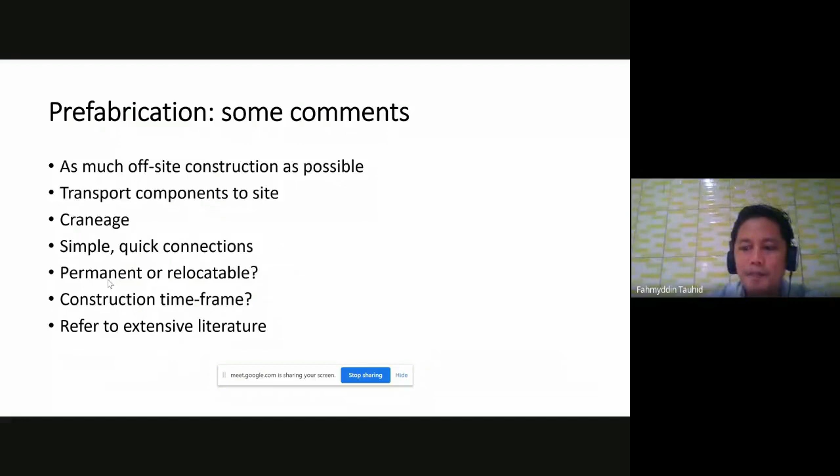Yes, so we have to answer the question: is the hospital going to have a permanent life, or are we going to deconstruct it and maybe relocate it? Maybe it could be stored somewhere so that in another crisis in some years' time, it could be erected somewhere else. Because if we want our structure to be relocatable, then we have to make sure that it's basically a bolted construction, and everything can be unbolted and rebolted.

Then there's the question of the time frame. How long have we got to design and build such a facility? And of course, the longer we've got to build it, I suppose the better the job will be, because we're going to be able to perhaps make the construction more economical, because we won't be putting so much emphasis on speed. So the construction time frame is also important.

And finally, I just want to refer you to quite extensive literature on prefabrication. Prefabrication is not a new phenomenon. In fact, it started as early as the 14th century. Famous kings had their temporary houses transported with them when they went on battles. And so prefabrication has actually been around for a long time. And I think you would enjoy looking at some of the literature that talks about it. But I'm not going to say any more about that today.

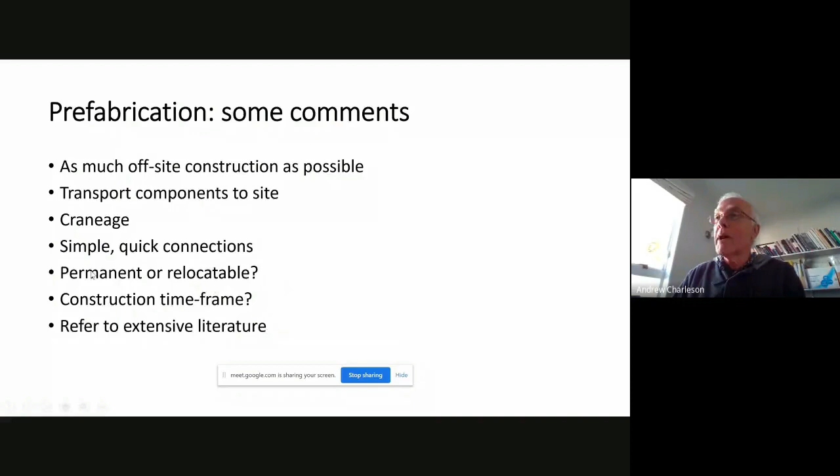So I just want to now mention just 4 aspects of hospital design. And the first aspect is that in hospitals, there are so many functions that we as designers have to accommodate. There are big numbers of staff and different types of staff: doctors, nurses, support staff. And the support staff include, I suppose, administrators through to technicians, through to maintenance staff.

And then there are lots of departments in hospitals: a department for doing triaging or examinations, radiology, pharmacy, laboratory, the wards for the patients, operating theatres, intensive care units, and so on. So a fully functional hospital is actually very complex, with a number of different departments and different aspects that designers have to consider.

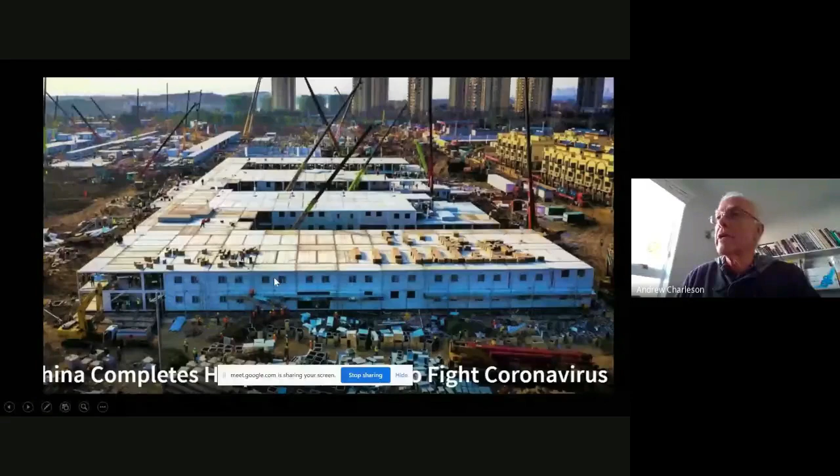Secondly, you can see the large number of cranes on the site. And during the foundation works, there would have been 20 or 30 diggers and bulldozers. So the whole scale of construction is just beyond what most of us have ever encountered. And then we can begin to see the structural framework of the building.

And over on the left-hand side, can you see my cursor, please? Is my cursor visible? Oh, thank you. Yes, we can.

Thank you. So you can see that the construction of the superstructure has begun by putting down a floor system. And there we can see the floor system. And then the workers erect columns, and in this building, they're all out of structural steel. And the columns have some degree of fixity at their base, like they're able to cantilever vertically. And then having erected the columns, this floor is craned into position. And look, here is a big stack of floor slabs ready to be craned in.

And then what surprised me is that they put in this system, and then immediately over the top of it, they put in another floor system. So can you see these 2 layers of structure? Now that seems to me very unusual. And maybe this was the price for the speed that was required. Because normally we would never construct having a ceiling system and a floor system just one on top of the other. So, you know, that is very unusual.

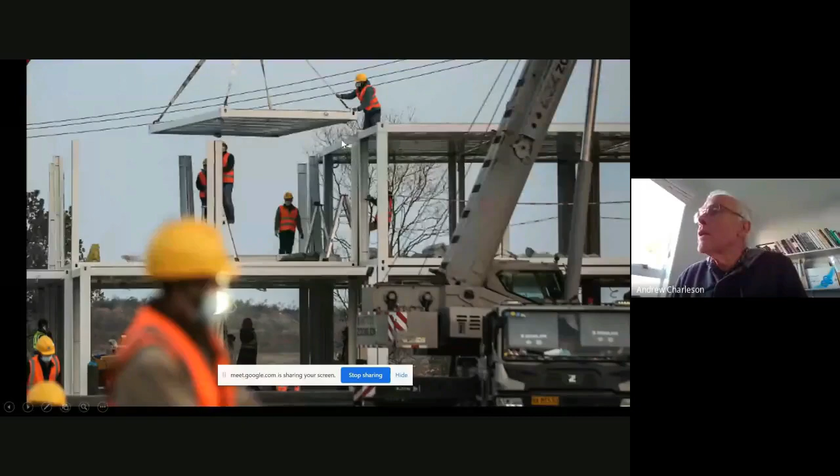Anyway, then they build up more columns and put the roofing on, given that it's only a two-story building. Here we see the roof system being craned into position and being lowered on to these vertical cantilevered columns. And so in some way, there's enough rigidity in these joints to create a type of frame action to give resistance to wind forces and earthquake forces, because there's no other bracing in this building.

Here on the right of the screen, you can see the double layers. That is so surprising, and we would need more details to really understand exactly why they might have done that.

In other parts of the building, we see them craning down a module, like a self-contained room, really. Maybe this room will house several patients. And this little room has got its own floor system. It's got some steel beams and flooring. And this floor system goes straight on top of this existing platform here that has been craned into position.

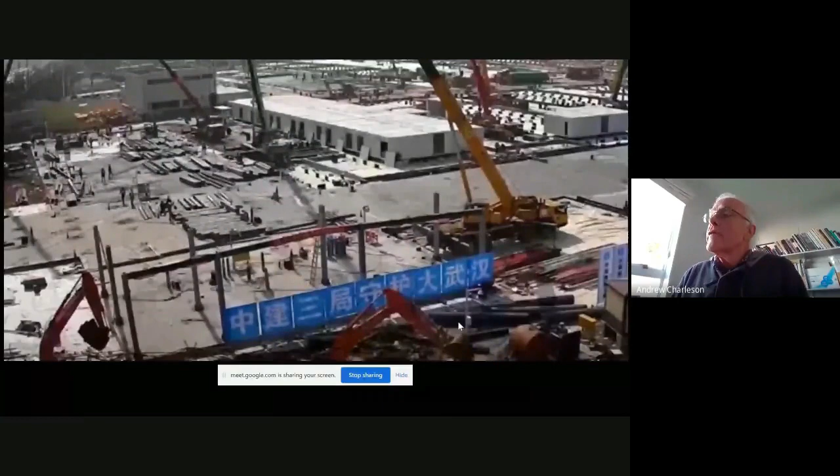I'm not sure if this is the same site as the other hospital or not. This might be the second prefabricated hospital that was designed and built incredibly quickly. But I show you this slide because here you can see some quite long spans in this part of the hospital complex. I mean, this would be probably between 8 and 10 meters, and maybe this span could be as

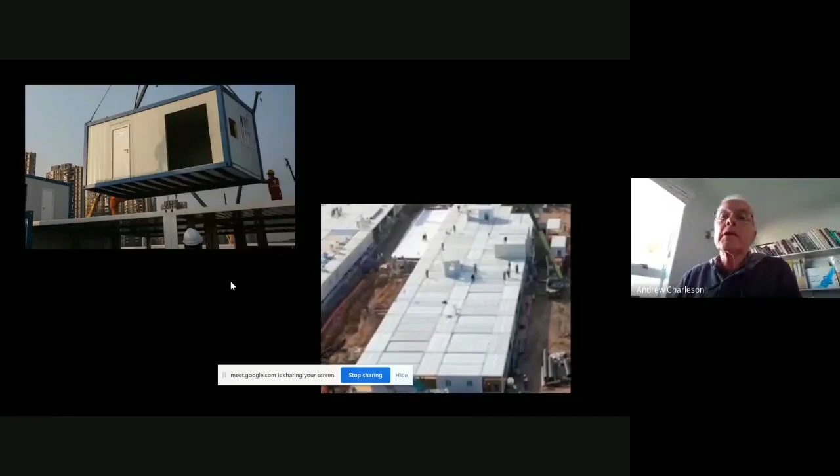much as 12 meters. Whereas the previous construction we saw, the module is only of the order of maybe 3 to 6 meters, quite small spans between modules. So this is just to remind us that it is possible to build quickly using prefabrication and have somewhat longer spans. Notice too at this stage that all the structure has been in steel. That is definitely the material of choice for prefabrication.

And the vertical load-bearing elements consist of steel sandwich panels with high density polyurethane foam acting as the sandwich filling. And so, in contrast to the Chinese hospitals, a hospital like this is relying on wall panels. They might be about 12 centimeters thick, not that thick. And these wall panels are capable of resisting the gravity loads and any horizontal loads from wind and earthquake.

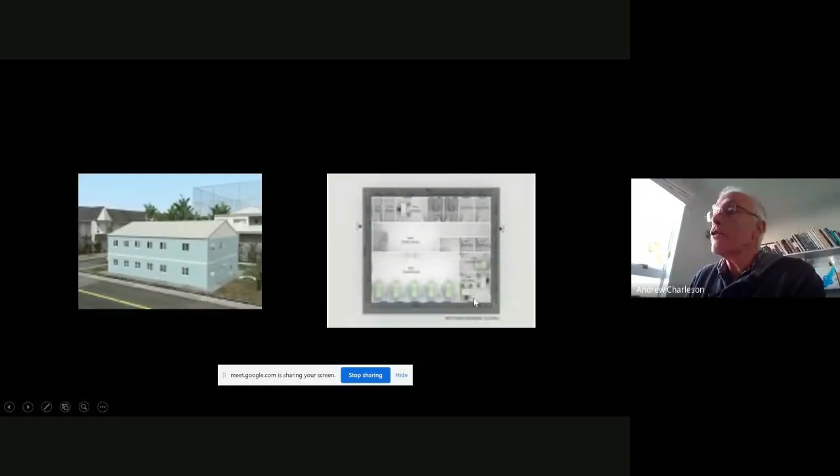And so this is a totally different model of prefabrication, not using any columns at all, but it's all about using load-bearing panels. And of course, because the span across the building is so great, it means that the beams spanning have to be quite deep. And from memory, this distance is 13 meters, so the beams or trusses would have to be about 60 centimeters deep at mid-span in order to span 13 meters.

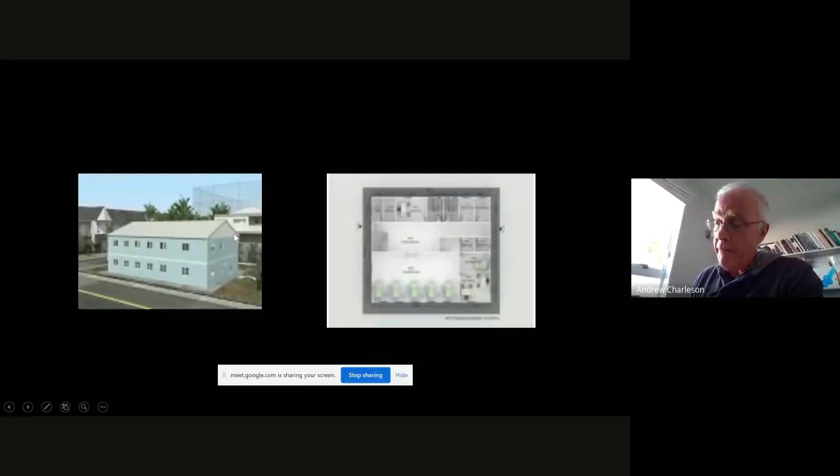Anyway, this type of construction is certainly very lightweight. There's no concrete in the superstructure. And the roof trusses would probably be made out of very thin gauge galvanized steel components.

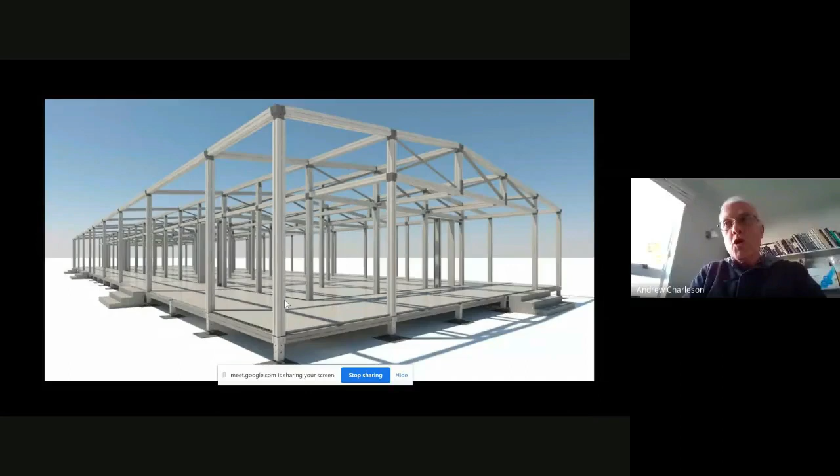And here is another type of prefabricated hospital structure, just showing the structure, no cladding yet, no roofing. And what I found interesting about this particular one is that all the structural components are aluminium. And of course that rings warning bells to me, because aluminium is quite an expensive metal and it's an expensive material. And so this type of construction, I would think, would be very expensive. But it looks very effective.

It's relying on small modules, I think about 2.4 meters here. And it's interesting, they do have some larger spans here, for example, because they're using this truss. And so in this building, they've got perhaps a corridor here and longer spans to create some larger functional modules. This, of course, is only a single-story building, and so the structure is a lot more simple, really. But nonetheless, we would need some rigidity in the joints to make this framework stable against earthquakes and wind.

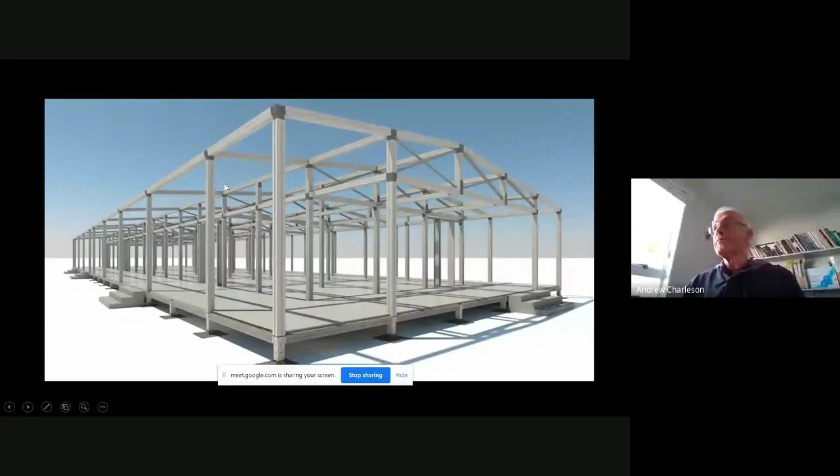So there we have finished the first couple of sections of my presentation. And now I want to move on to structural considerations. And I want to begin by talking about siting.

It's really crucial when we are thinking about providing a hospital that the site is safe. And so it's absolutely essential that we eliminate any risk of tsunami.

We've got to make sure that there's no liquefaction that could destroy the hospital or make it not function properly. And also we have to avoid the possibility of lateral spreading.

Lateral spreading occurs generally close to water bodies like rivers or lakes, where during an earthquake, the land near the lake or the river slides towards the river. We call that lateral spreading. So you definitely don't want to site a hospital near a river, nor do we want to site it where it could be affected by landslides or rock fall.

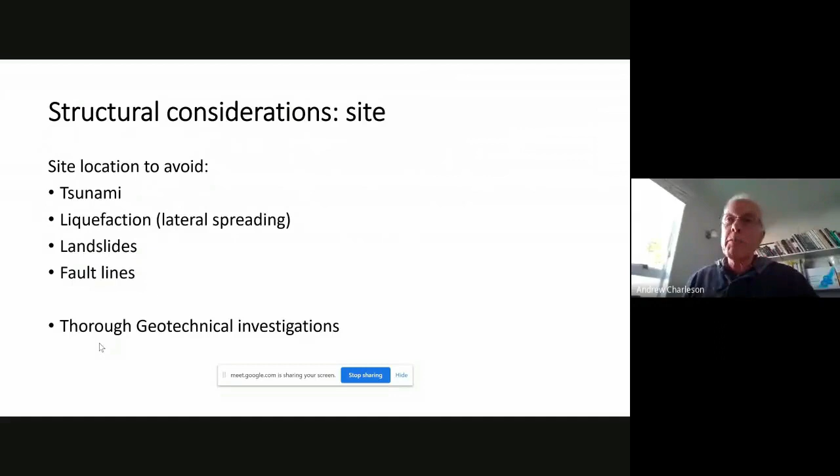So next, I want to talk about the loads that we would design such a prefabricated hospital for. Now, the first three types of load, dead load, live load, and wind load, they are just typical loads that we would design any hospital for, and in fact, any other building for.

We might have some areas of a hospital where the live load is heavier than, say, for an office building, because there might be some heavy equipment. But otherwise, all these loads are pretty much what we are used to in normal buildings.

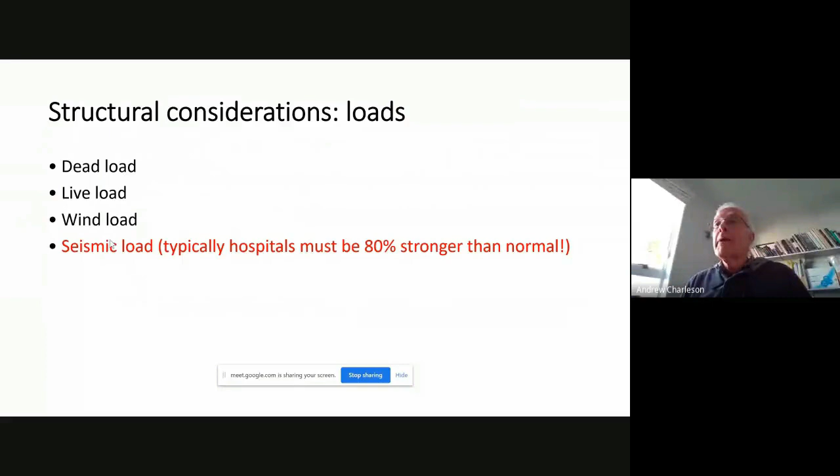But then we come to the seismic load that we must design any hospital for. And I just want to alert you to the fact that typically hospitals must be 80% stronger than normal buildings. And I think you'll see the logic in that.

The thinking is that we want hospitals to be operational immediately after an earthquake or any other crisis. And so we must give the hospitals greater strength so that their performance will be far better than typical buildings nearby.

And this means that the structure in hospitals is typically quite a bit more significant, or the members would be somewhat larger than what we normally see in the average buildings of the same size.

And I write the seismic load in red to also highlight to you that you as Indonesian people, and like me living in New Zealand, all of us, we live in a very highly seismically active country.

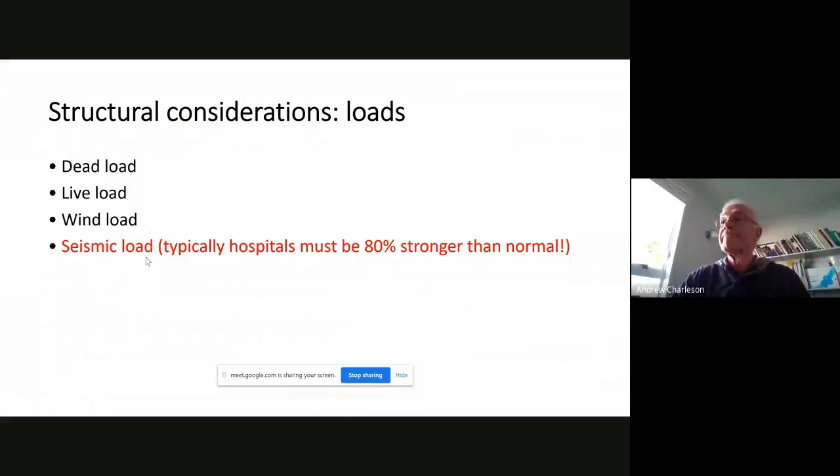And so this reminds us that when we're in Indonesia, we have to take earthquake design incredibly seriously.

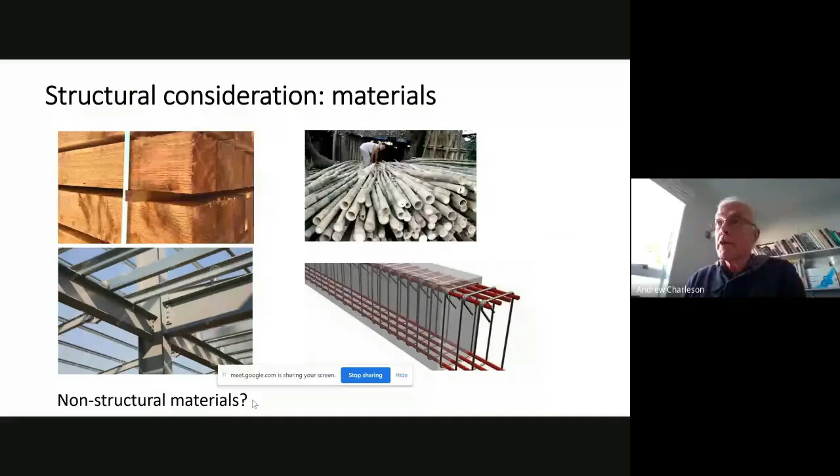Next, just a comment about structural modules. As designers, we have an infinite number of possibilities when it comes to the structural module of a building.

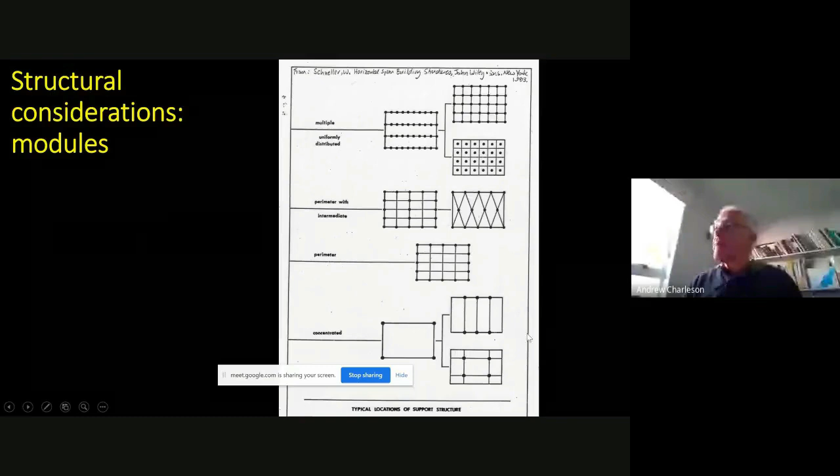So to sum up this slide, in prefabricated structures it's better to think about the structure being uniformly distributed. That would be my personal recommendation, and we wouldn't bother with any of these other options. Okay, move on.

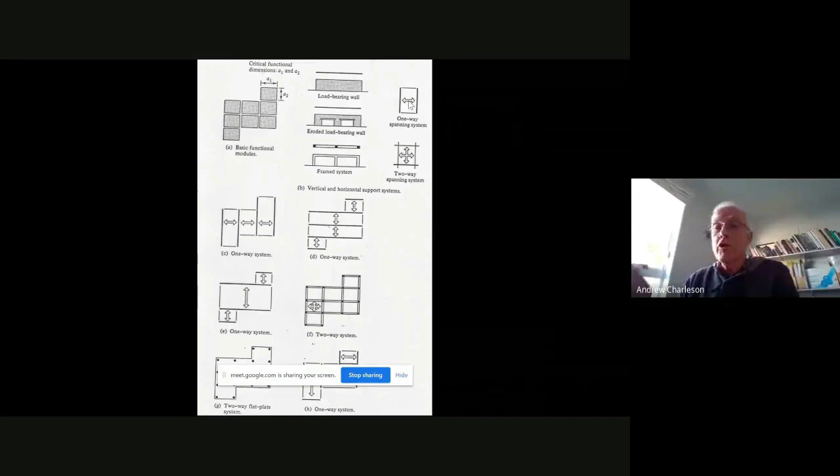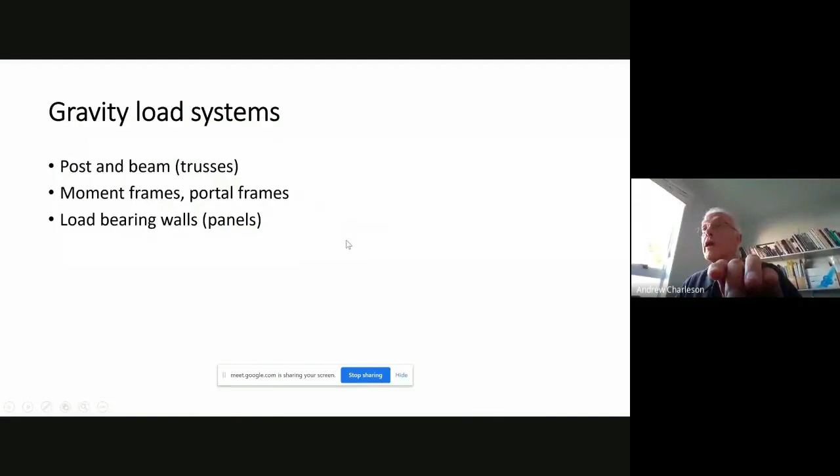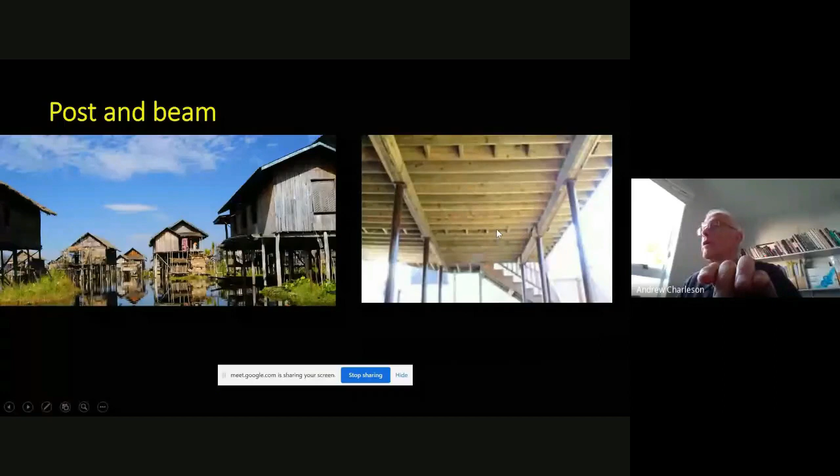Now I want to talk about gravity systems - these are the gravity members that we have in most of our buildings. They're post and beam structures, usually with pin joints, top and bottom. Here's a nice example of a primary beam with floor joists or secondary beams running at right angles, supporting the flooring - this is the most simple of all construction types.

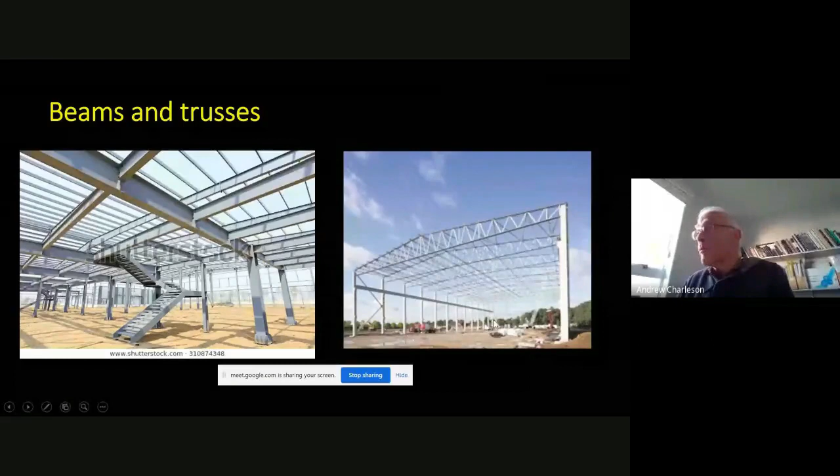And don't forget, we can have prefabrication using walls. I've already talked about using sandwich panels.

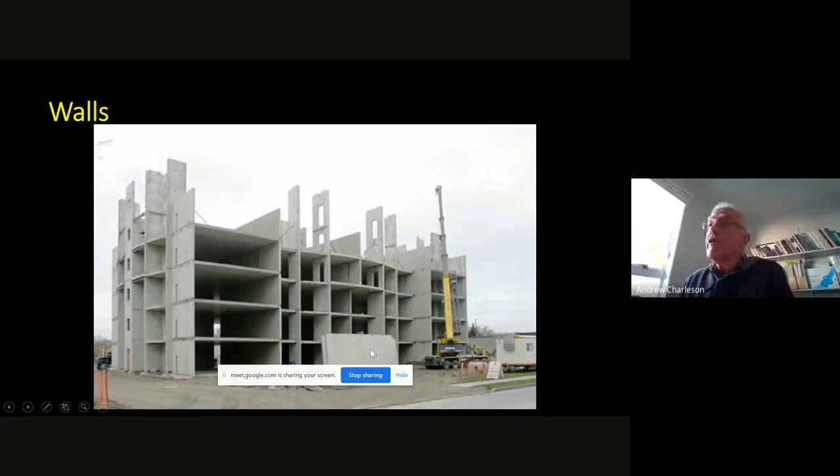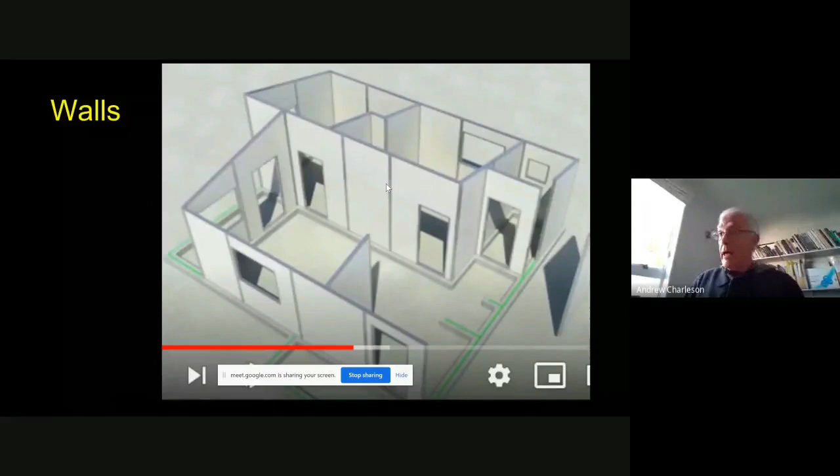What about flooring systems? Well, in prefabricated buildings, we pretty much want to use one-way floor systems, and so we want to avoid two-way systems that use cast-in-place reinforced concrete.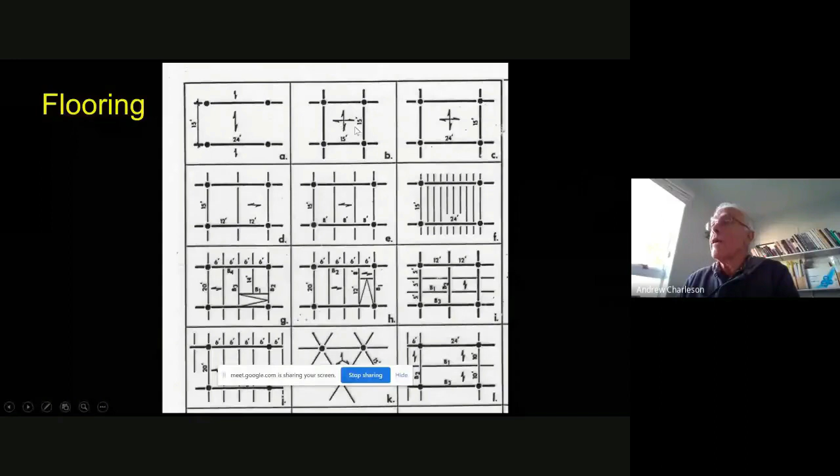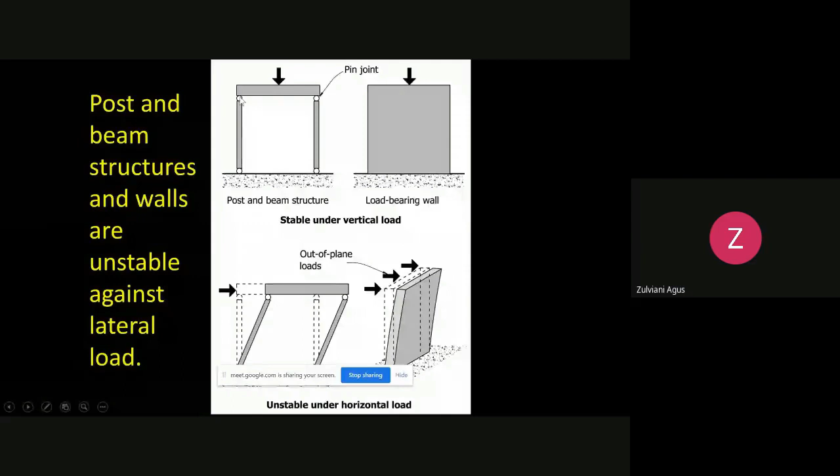What about systems to resist lateral load, like earthquakes? Let me remind you that when we have a post and beam structure like this, we assume there are pin joints at the bottoms of the posts and the tops. So a post and beam structure is great for vertical loads, but if there are any horizontal loads, it's actually totally unstable and collapses.

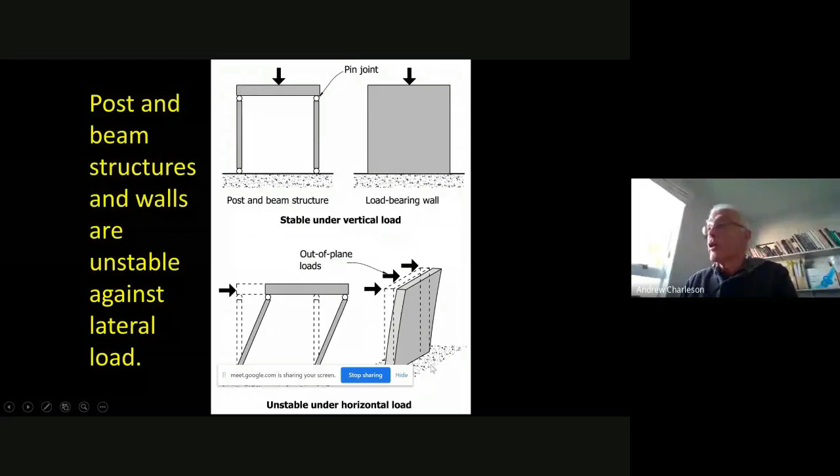A similar thing happens to load-bearing walls. They're very stable vertically, but if you push a wall out, it'll fall over. So a load-bearing wall can be used to resist vertical loads, but it cannot be used to resist loads at right angles to its length. It needs support in that direction. It's unstable under horizontal load at right angles to its length.

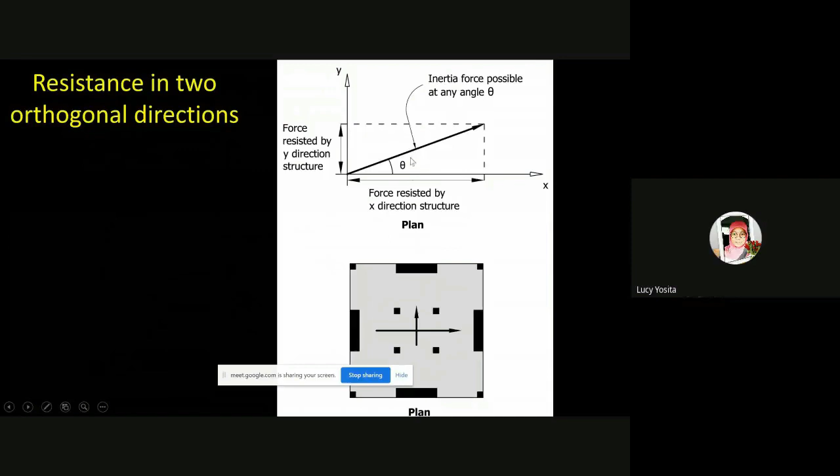Now, when we are designing the configuration of a hospital or any building, we've got to make sure it can withstand earthquake shaking coming from any direction. Here is an earthquake pulse at an angle to the main axes of the structure, shown in plan. So if we want to resist earthquake attack from any direction, we have to provide earthquake strength in the Y direction and the X direction.

So in every building we as designers design, we must always have strength in both directions, in the X and the Y. There are no exceptions.

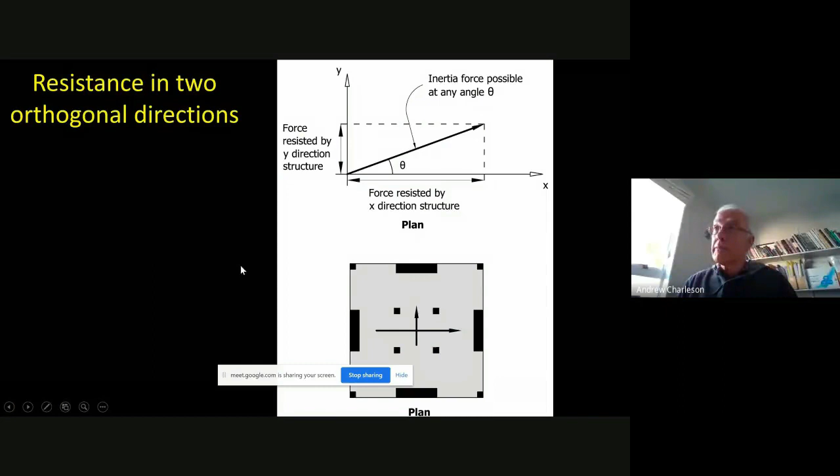And when we choose the systems to give us the strength, we have a choice of 3 systems. We can use shear walls, we can use braced frames, or we can use moment frames. Those are our choices. Depending on the size of the building, we choose as many elements as needed.

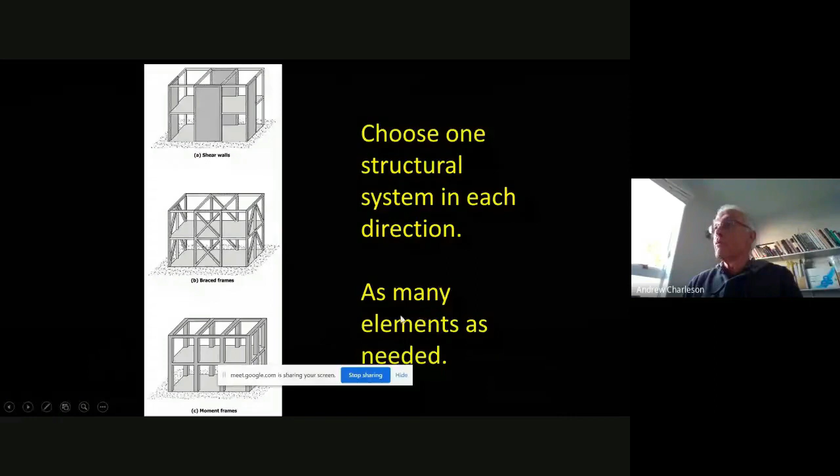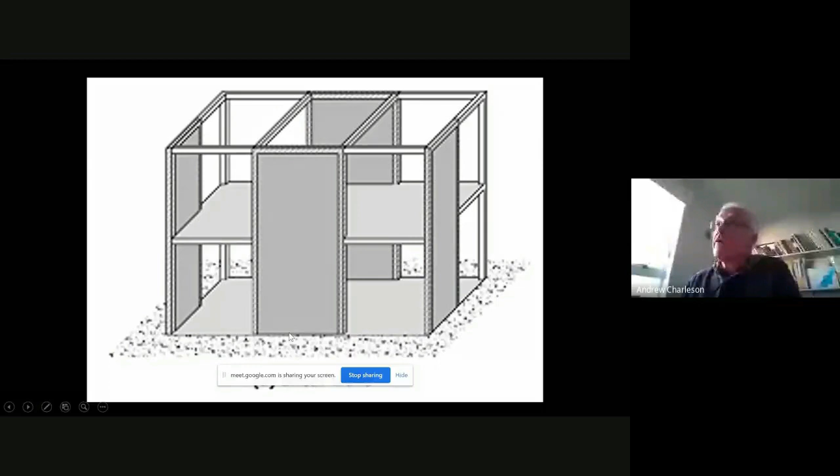Here is a simple shear wall building. The shear walls are vertical and they have to be continuous from the foundation beam to the roof.

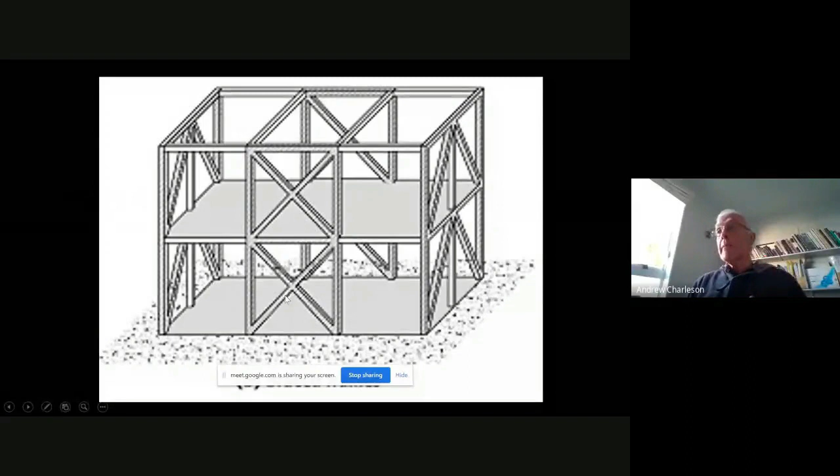Here's a cross brace frame building, a 1 bay frame on each side. As you can appreciate, a braced frame gets its strength from the triangulation of the members. Braced frames come in different geometries, and any of these geometries we can use in conjunction with discussions with our structural engineer.

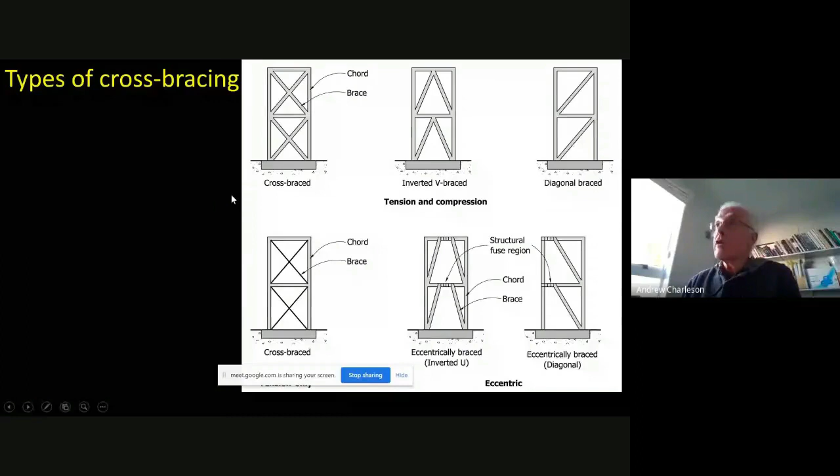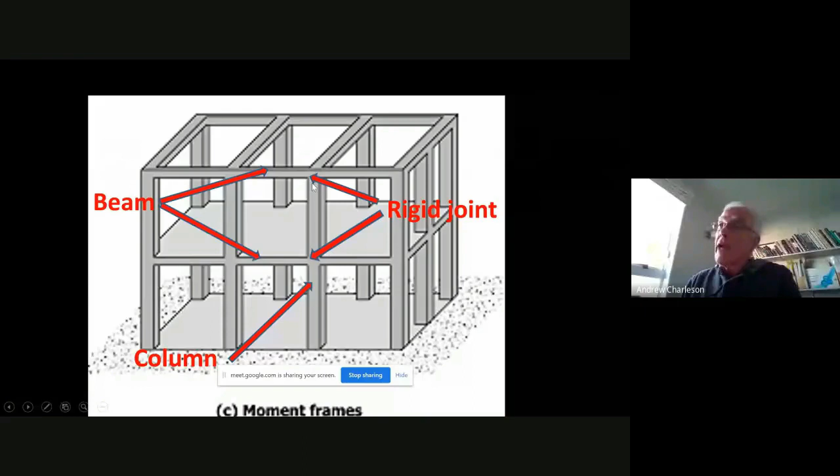And finally, we've got the option of using moment frames to resist earthquake. We just have to make sure that we've got nice strong columns, strong beams, and very importantly, every joint must be very strong and rigid. Only then do we have a proper and strong moment frame.

We have to make sure the columns are oriented properly. This frame here is going to resist forces in this direction and only this direction, so the columns have to be strong in the X direction. This column is wrong because it is weak in the X direction, so this frame is almost useless.

The same goes for steel. This steel column is strong in the direction of the beam and the frame, that's great. But this column is weak in this direction, so this frame is also almost useless. We've got to be really careful about the orientation of the columns in our moment frames.

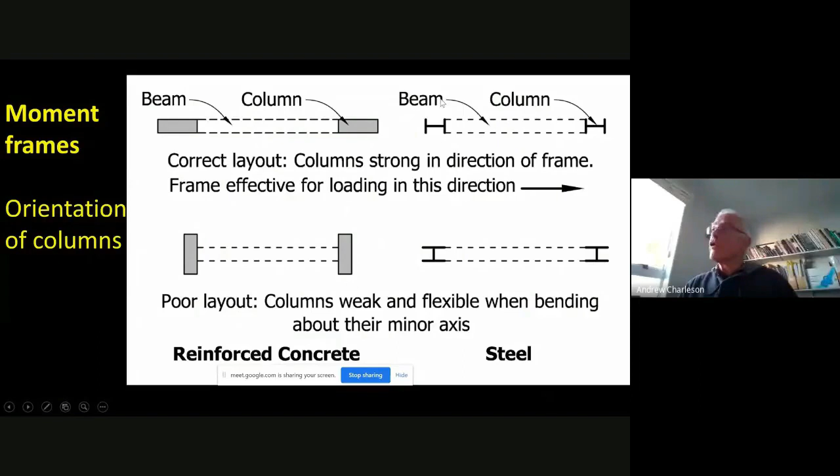Now, finally, what about horizontal elements, floor and roof diaphragms?

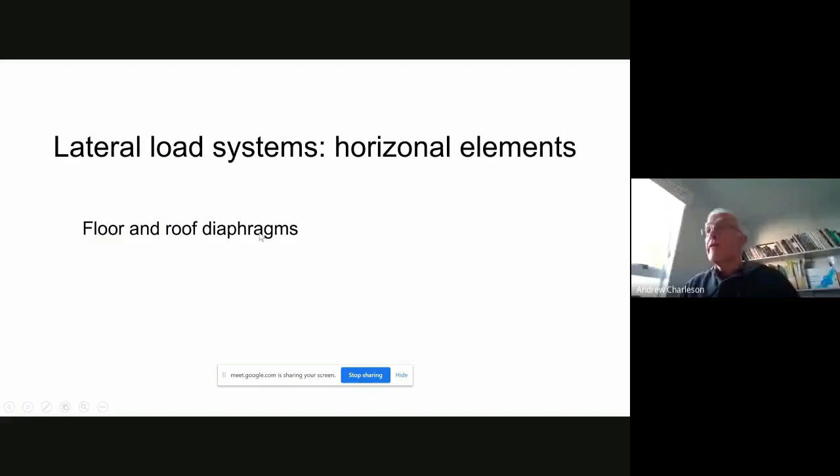During an earthquake, the horizontal forces in the earthquake shaking are shown on this diagram, which is a cross-section through a building. And in plan, the earthquake forces are shown like this. And they rely on a floor or a roof diaphragm to transfer these forces into the safety of the vertical structure. In this case, it's a structural wall, but it could be something else like a frame or cross bracing.

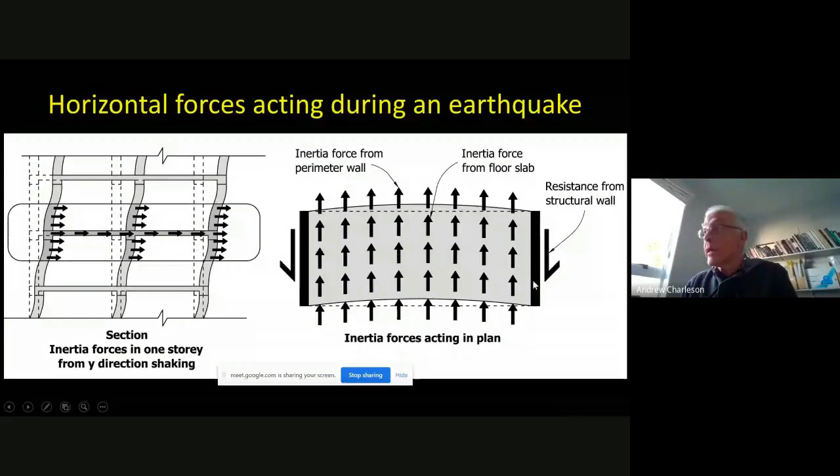Now, if we have our earthquake resisting structure, say on the perimeter of our building, then the structure is quite discrete. Like in the Y direction, this building is relying on 2 shear walls, here and here. And so we need a strong diaphragm to span between this wall and that wall.

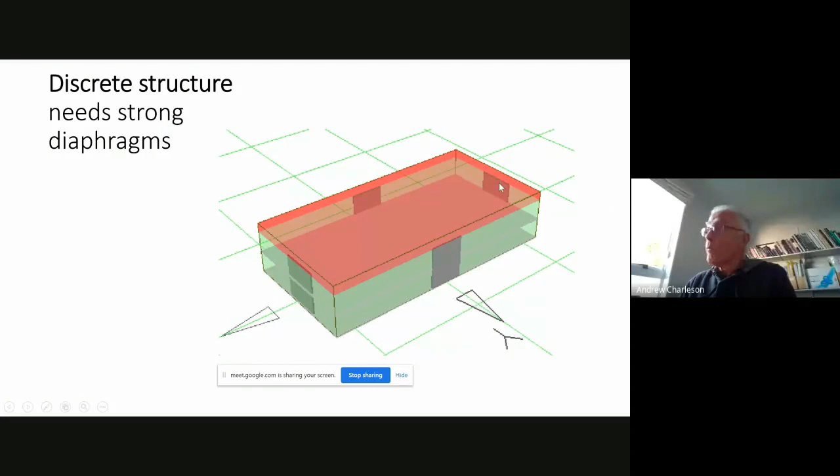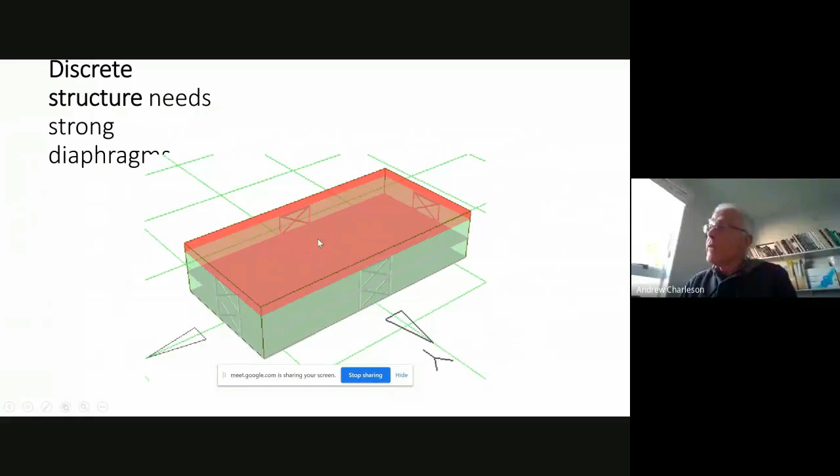But if the lateral load structure is distributed throughout the plan of the building, like here's an example where I'm using shear walls to resist earthquake, and I've used lots of them, but each of them is quite small compared to the previous cases. If we have distributed structure in plan, then the diaphragm doesn't have far to span. It only needs to span between each wall. And therefore, the diaphragm doesn't need to be very strong.

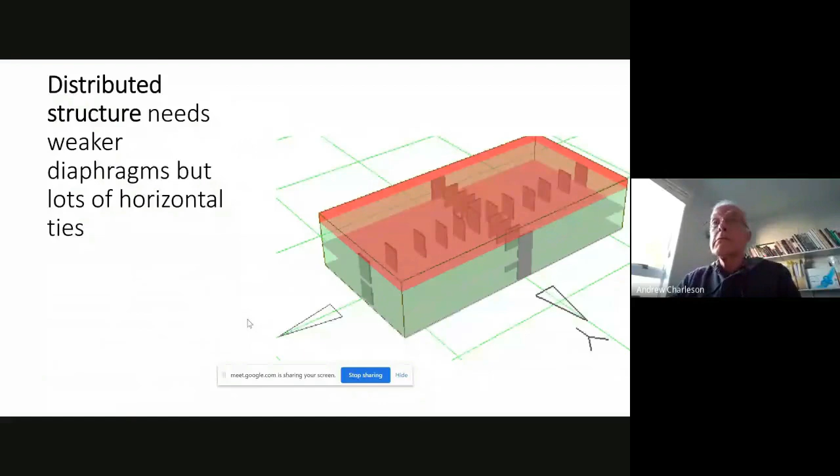But we need lots of horizontal ties to tie all the building together so that during an earthquake, the building doesn't shake to pieces. It doesn't fall apart, if you get what I mean. Here's another example of using distributed structure. In this case, using lots of single bay moment frames. And because the frames are distributed throughout the plan, the diaphragm, once again, does not need to be strong.

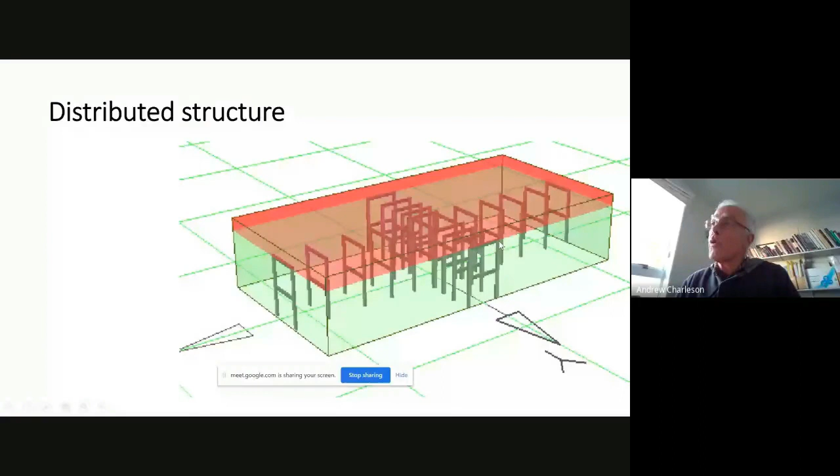Now, in these drawings I haven't shown you the columns that just resist the gravity loads. Obviously there'd be a column in the corner of the building and lots of other columns, but I haven't shown those. I'm just showing you the structure needed to resist wind and earthquake. And so the big question for all of us designers is how much vertical structure do you need? How many shear walls do you need? And how long do they have to be?

Okay, here we go. The second one is from Mr. Rahid. It seems like he is an architect. There are two questions for you. Are you ready for that? Yes, thank you. The first one is: is there any principle of beam concept that can be applied in the prefabricated building? Could you please read that question again rather slowly, because I couldn't hear. Okay, I will read again. Wait a minute, I'll type it, sorry. Is there any principle for column and beam concept that can be applied in prefabricated buildings?

No, there's no definitive approach that is recommended. I guess we saw in that Wuhan hospital, all the columns and beams are of structural steel, and they've got sort of rigid joints as part of the construction process. So there's no one way of designing structure. Each building has to be considered from first principles, really.